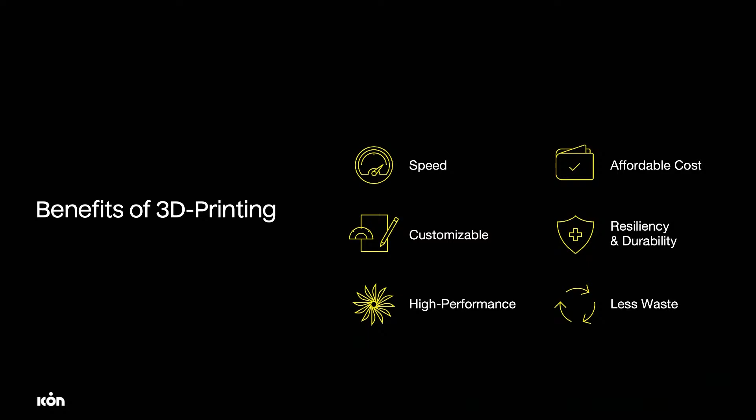The other key advantage and value add of additive manufacturing is that we have tremendous freedom of form that we can explore. I'll speak to that in a second. But overwhelmingly, what we've found is that compared with standard materials and methods like stick frame, concrete, and masonry, we have overwhelming speed when we're 3D printing out on site.

It introduces more affordable costs in the housing sector. We have a fully customizable system in the sense that, being a digitally native environment, you can essentially model and print anything within the realm of physics. So we play into that versatility to introduce customizability where we can. The printer is agnostic to what it prints.

And so we really try to introduce benefit by playing on customizability where we can in our work. Because we're using a mortar-based concrete material, it's a highly resilient system we've developed. We play into that to introduce a more durable system, which we believe has greater longevity than other materials and methods of construction.

To me, it's another, different way of thinking about sustainable construction. We're not building anticipating that there's going to be renovations happening within 3 to 4 years. We want to build architecture, homes, and structures that can stand for the next 100 years. This is a different kind of outlook towards how we're approaching design.

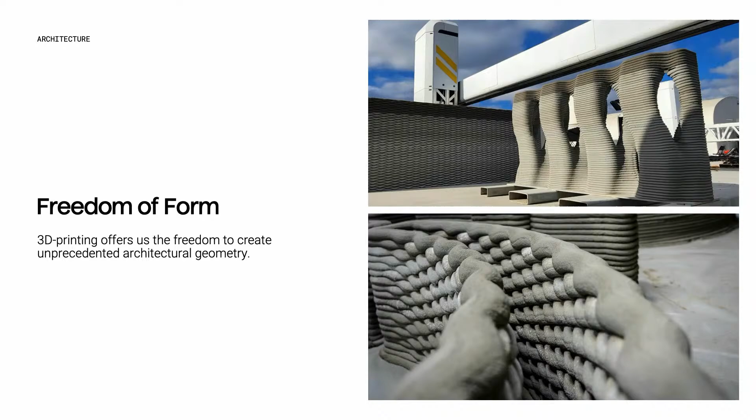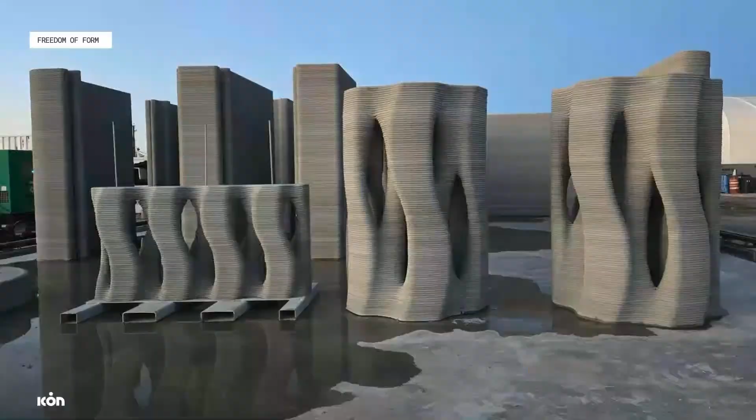So we play into the capacity to create organic geometries, more eccentric shapes, textures, and patterns where we can. We've also investigated domed structures and how we can create more corbelled geometries, which are more typical of compression-based structures, less typical of stick frame. This is something we look to incorporate in a way that's cost-effective and efficient in construction.

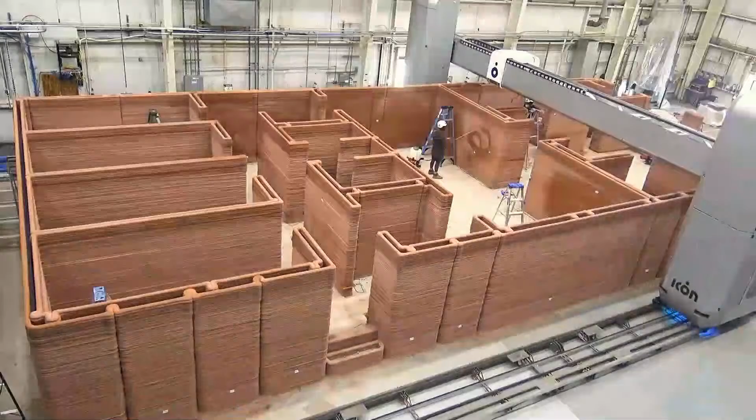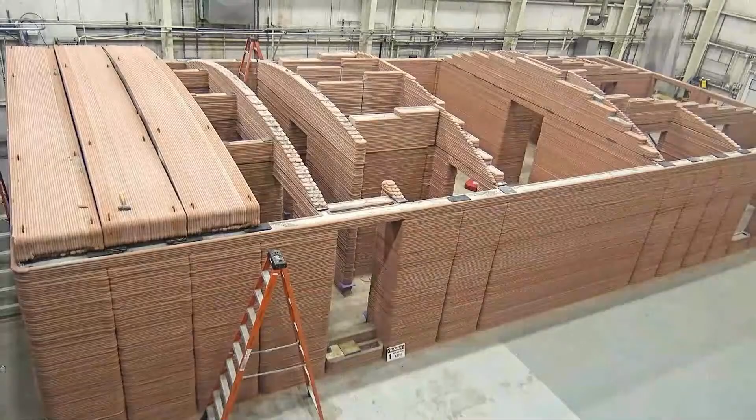This is a quick time lapse of what our terrestrial construction system looks like. You'll see that we're working with a gantry system, essentially operating on rails. The limit of the gantry system currently is 12 feet tall. We've been prototyping and working with this system to advance our on-site construction capabilities.

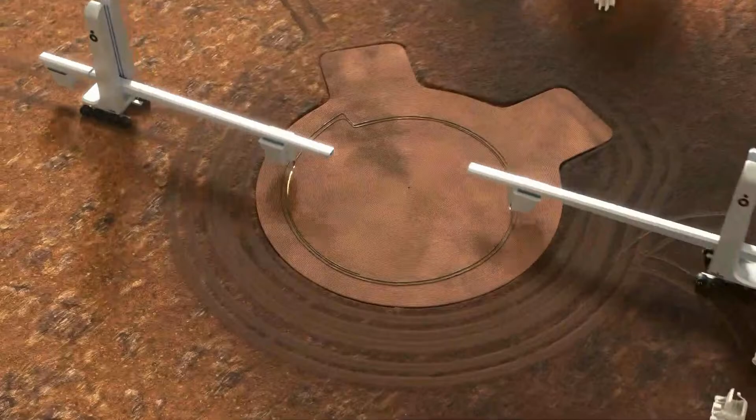That work has also been in support of advancing technology development for our in-space systems. Since ICON started, ICON has been a contributor and thought leader in thinking about autonomous construction on other planets, particularly the Moon and Mars. We use our terrestrial work as a vehicle for advancing essential technology development questions inherent in how you build on other worlds.

Around 2020, ICON started a collaboration with a NASA group called the Moon to Mars Planetary Autonomous Construction Technologies Program. This group at NASA is interested in using in situ materials, meaning local and indigenous materials, on the surface of the Moon and Mars to create various kinds of infrastructure. Over a one-year-long collaboration pursuing architectural visions, which Julian will detail, and working with academic and industry partners, ICON was awarded a $57 million Small Business Innovation Research Grant to develop technologies that can one day be deployed on the surface of the Moon.

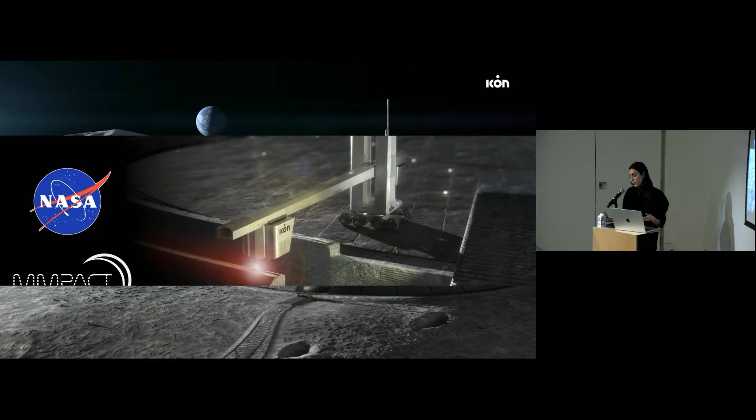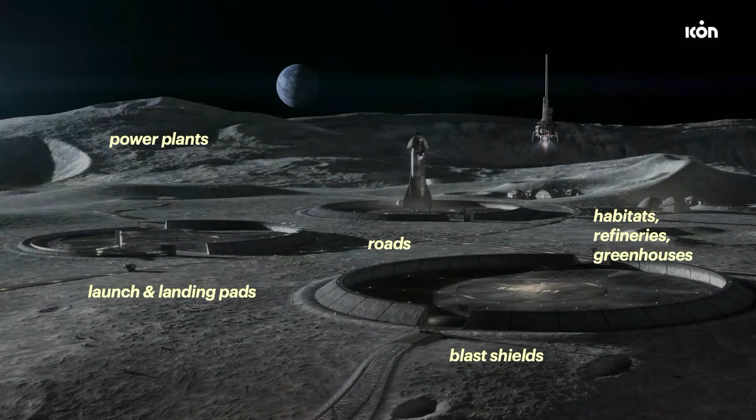In order to answer what hardware will one day 3D print on the Moon, we asked ourselves what are the artifacts, the specimens, the infrastructure this system would have to print. It became a call and response investigation, where to determine the hardware requirements, we had to ask what is the use case, what is the application of the technology. So ICON took it upon ourselves to introduce design concepts for habitats, unpressurized shelters, and we're continuing to work on horizontal construction types in support of 3D printing in space.

This was all done without being asked by NASA. NASA didn't say give us a vision for space architecture that can be 3D printed, but it's something we took upon ourselves because we felt it was important in pursuing the question of what is the most essential infrastructure. Pursuing various collaborations, we came up with designs and concepts for landing pads, blast shields, and habitats. Julian will talk more about one of those.

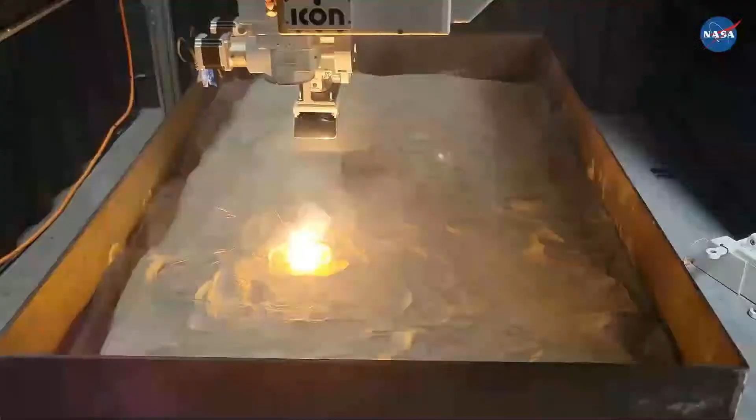Around that same time, in ICON's facilities, we started messing around with weapons-grade lasers. This is an example of a regolith test bed that we have in our headquarters in Austin.

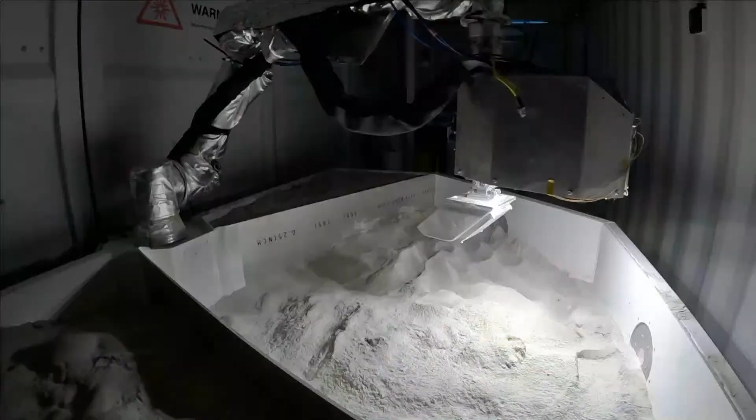Our off-Earth work, referred to as Project Olympus, has developed a robotic test bed with an end effector able to scoop, sieve, and process local regolith—basically the sand you see here, a regolith simulant—and sinter it onto itself. In successive layers, we apply more material, level it out, scoop and sieve it, validate it for its properties, and continue manufacturing the artifact.

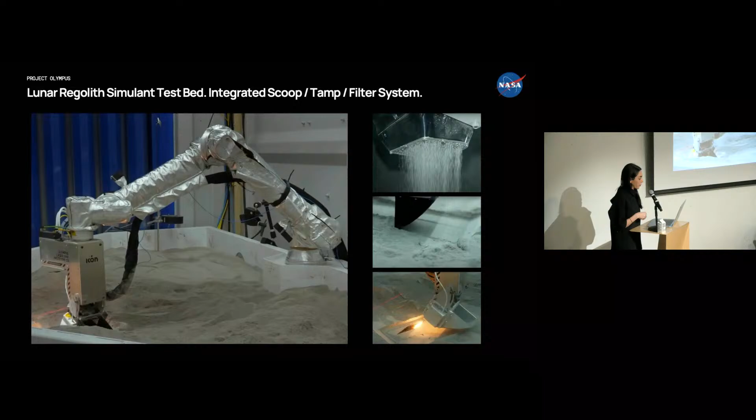Here's an image showing how we have an integrated scoop, tamp, and filtering system within this one end effector. We're prototyping that within a small regolith test bed of simulant, but also developing a prototype for a larger robotic manipulator, more along the scope and scale of what flight hardware might look like on the surface of the Moon.

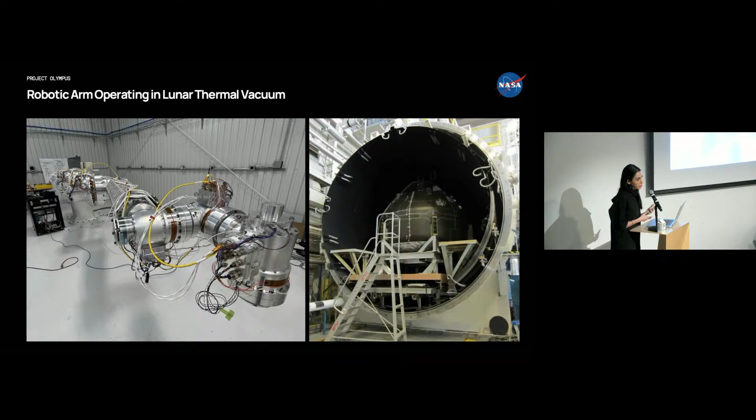In the last six months, the prototype robotic arm you're seeing on the left was tested within the Large Dirty Vacuum Chamber at Marshall Space Flight Center to evaluate how it performs and whether it can withstand lunar thermal vacuum conditions.

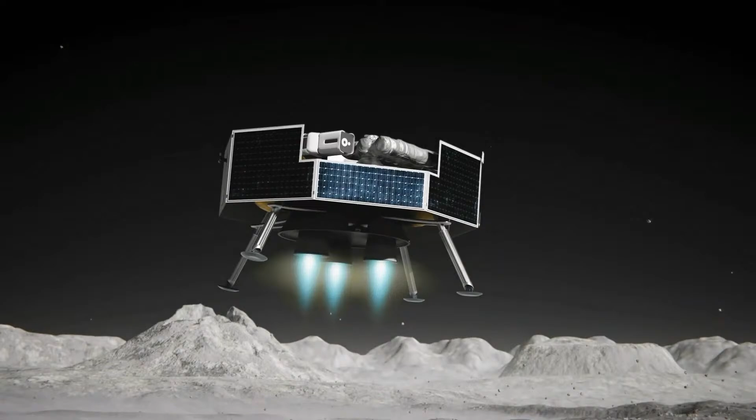We created this video to show what we feel is going to be the first demonstration mission with this system. Essentially, we're looking to deploy the Olympus robotic arm aboard a generic CLPS-style mission, which is what you're seeing here—this is a CLPS lander.

The robotic manipulator would scoop the local regolith, validate it for its mineralogy and properties, create a level surface as you saw within the small robotic test bed, and then lay successive layers upon itself to create the kind of infrastructure we're most interested in.

Our first demonstration mission is planned within the next six years, I would say, although we're not flight manifest right now. But the important thing is that the technology development has been happening steadily since 2020.

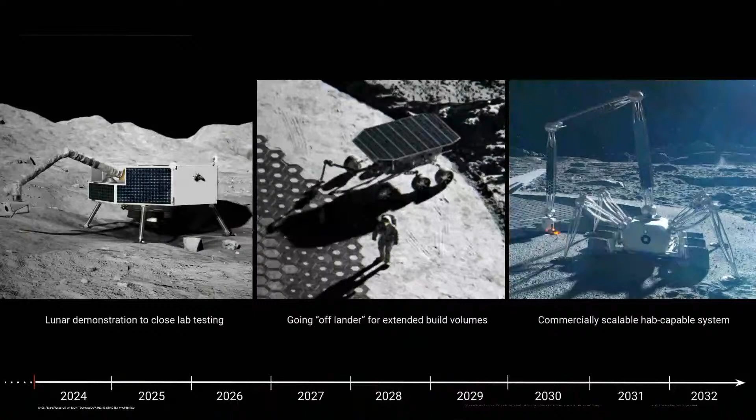Our vision is that the first demonstration mission would be aboard a CLPS lander. Eventually we'll go off-lander to build extended volumes. And then finally we'll have a commercially scalable, habitat-capable system that can create large-scale infrastructure that can one day house human beings or crews on temporary missions.

A lot of the technology development was not directly influenced by the architectural work and vision we put forward to NASA. However, when they saw that work, they immediately attached to it. And something remarkable happened—it's almost like you have to see it to believe it.

Our vision, and the vision put forward by the Bjarke Ingels Group, who was a consultant to ICON at the time, as well as by Space Exploration Architecture, was taken by NASA's Space Technology Mission Directorate, STMD, and they assembled the roadmap for their own excavation, construction, and outfitting capability development.

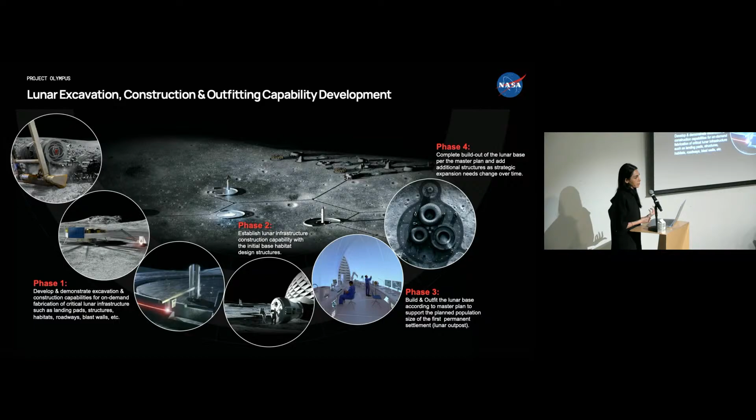I can't stress enough the power of an architectural vision to synergize thought leadership about very difficult, very wicked ideas that are hard to imagine and hard to really see happening in the world.

All of this work we're imagining happening in space brings direct impact to how we advance our technology here on Earth. We did an exercise with the NASA team investigating how we can create shared technology development initiatives in both our residential construction work, NASA's in-space construction work, as well as for the Air Force and the DoD. Overwhelmingly, there are shared initiatives among the three.

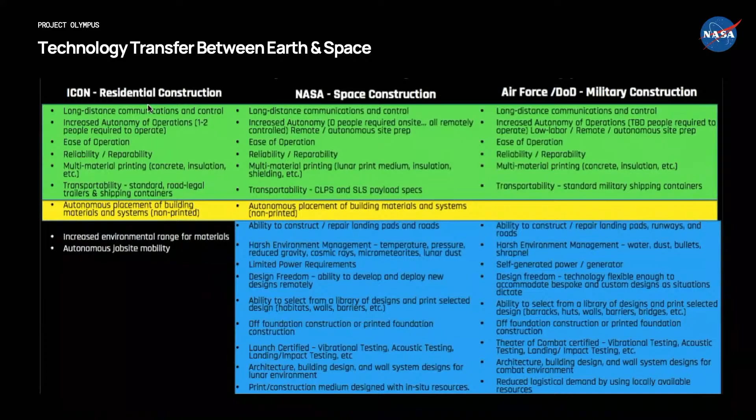Our thought here is, why not create dual use between Earth and space, create value at the same time, and solve these really challenging problems we have? Which brings us back to Earth, to the terrestrial construction systems. I'll speak to how and why we're creating the wall systems that we do, and also some of the regulatory implications of permitting 3D printed structures today, since it's still perceived as an emerging technology.

It is an emerging technology, yes.

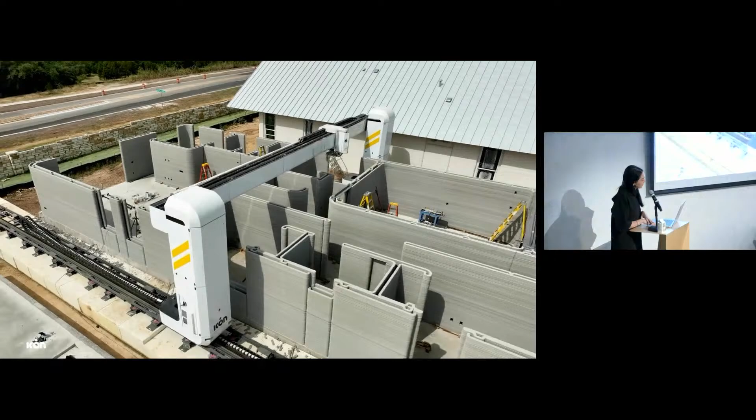So this is our Vulcan system. I mentioned it's a gantry-based construction system. It operates on rails. We have 2 towers as well as an X-beam that have been designed and engineered to fit within a shipping container. The height constraint of Vulcan is something to note, but this was a system specifically engineered for single-family detached housing, so we weren't looking at multi-story or multifamily construction at the time.

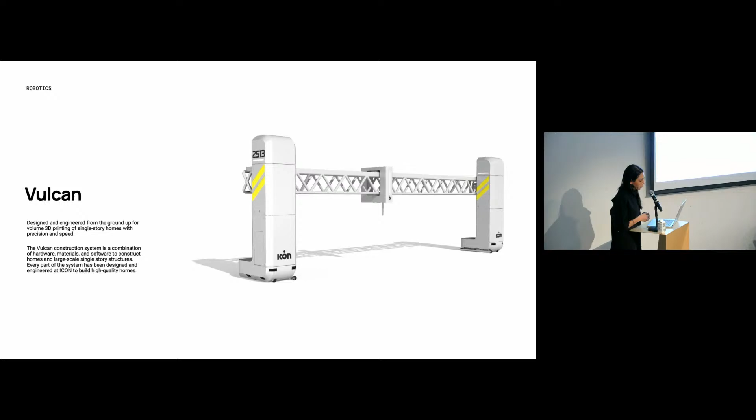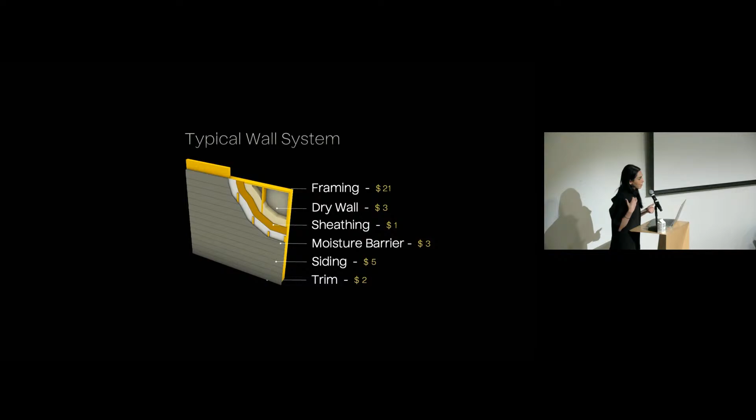In regards to wall systems, within a typical stick frame construction system, you have multiple trades and multiple materials and finishing items that you need to complete your wall system and create a weatherproof building enclosure. The important thing is that each of these elements has to be done in sequence, so if you have a delay on site by one of your trades, it delays the entire construction process. There's no way of really optimizing that when you have these disparate trades showing up at different times.

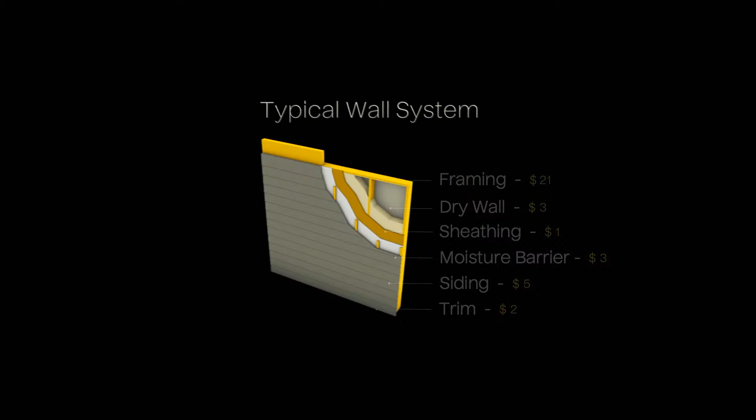You compare that, and what we're looking at, forgive the marketing speak, is an R13 wall, typically with no wind ratings and no fire ratings. There's potential for stick frame construction to be damaged by termites, damaged by mold, and it rots in water. Not very good in coastal regions or areas prone to flooding and hurricanes.

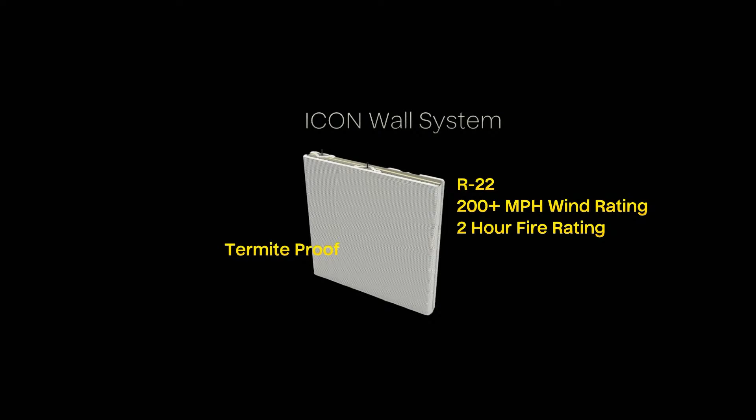Whereas, in contrast, we've developed a unified material and structural system with our 3D printed wall. Effectively, the material itself is the structure. We create formwork for structural cores within the wall system itself. It's a system that maintains high thermal mass.

Our lowest R rating is basically an R22. We can create more thickness, add more insulation in the wall for it to go up to like an R40. We have a 200 mile per hour wind rating. It's 2-hour fire rated, termite proof, mold resistant, flood resistant. So it's a way more resilient system. And of course, we're working in concrete, so the advantages are there.

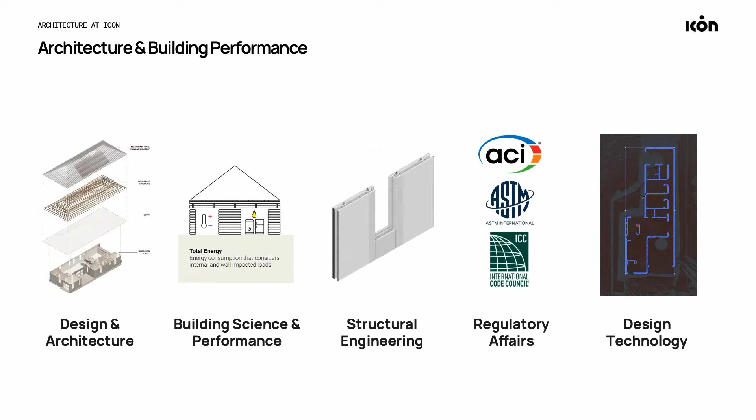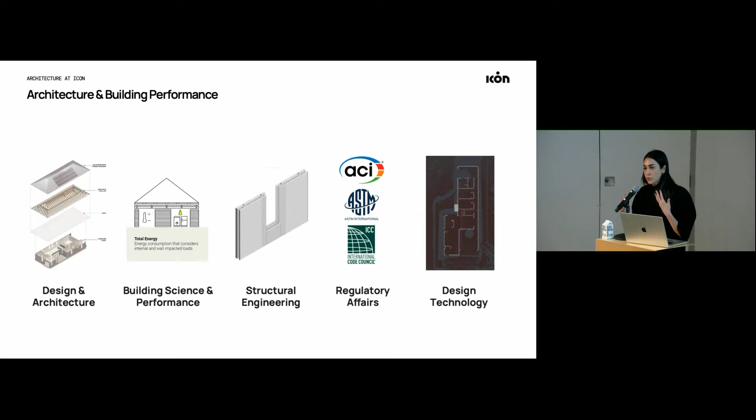When we started out investigating what architecture and building performance was at ICON, we realized that we need to merge many disciplines together to really address the problem of how you build and create wall systems and building enclosures using 3D printed construction. It was important for us to consider not only design, but also building science and performance, structural engineering, because this is an inherently structural system, and regulatory affairs, so that we can introduce a viable way for our system to be built in jurisdictions that know nothing about 3D printing, and design technology, which is essentially how you translate your design intent into functional G-code that the printer understands, but also permittable drawings.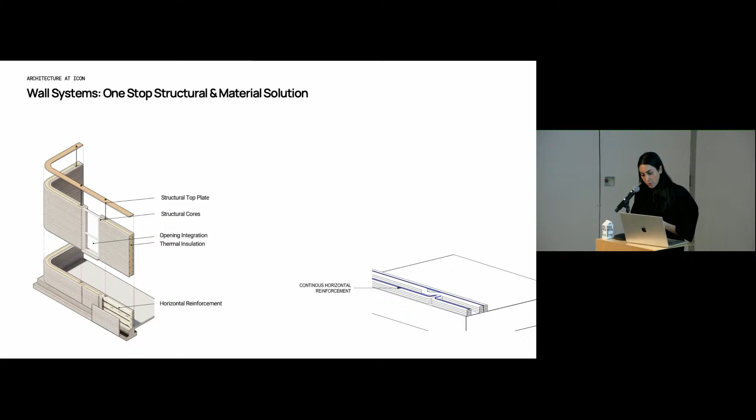So a little bit about the wall system. In this animation, you'll notice various types of reinforcement being added within the wall system at various points in the print. We have the capacity to include electrical as well as plumbing rough-in within the walls, and we've started to introduce a standard set of details for how we finish openings and create roof-to-wall connections. But essentially, there is a cavity with insulation within the wall.

I'll let it run again so you can see a little bit better. We have horizontal, vertical, as well as transverse reinforcement within the wall. So this is truly a building assembly and not just a single material that gets printed like on a desktop 3D printer. We work to resolve various architectural conditions within the prints for every project we encounter.

We pursue various certifications having to do with the 3D printed wall. Some of those are from ICC-ES, in particular the AC 509, one of the most well-known appendices written for 3D printed construction. We're compliant with IBHS Fortified, and we pursue many certifications to improve confidence in the system so that we can build nationally and hopefully globally in the future.

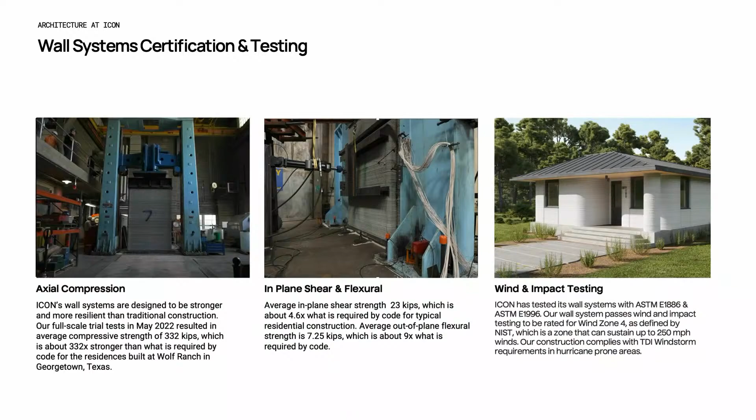Every change to a wall system requires a whole slew of testing, and you start to get a sense of just how monetarily intensive and demanding it is to create wall systems that have these certifications. That's a huge barrier for new systems and new technologies within architecture and construction. These are some of the regulatory bodies that we contribute to in subcommittees and making recommendations for standards.

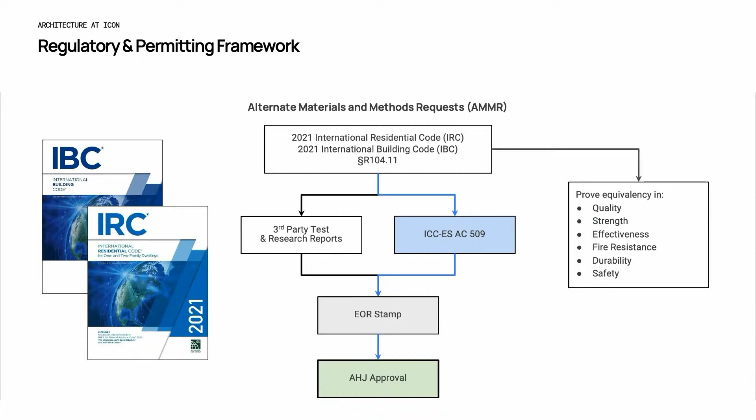The truth is there's no internationally accepted building code for 3D printed construction today. Currently, the way we're permitted in most parts of the United States is through a provision within the IBC that specifies it's up to the judgment of the building inspector to determine the soundness of the engineering and construction. That means we're typically providing a lot of engineering data and testing data to every city we're permitting within.

The alternative is to refer to the ICC-ES AC509 certification, which is kind of like a product acceptance criteria that's been reviewed by ICC-ES, validating the quality, strength, effectiveness, fire resistance, and durability of the system. We have a long way to go before every jurisdiction accepts AC509, and who knows, there may be new standards in the future that update that or take it to the next level.

I'll speak to a couple of project examples very quickly just to give you a sense of the scope and scale of things we've printed in the past.

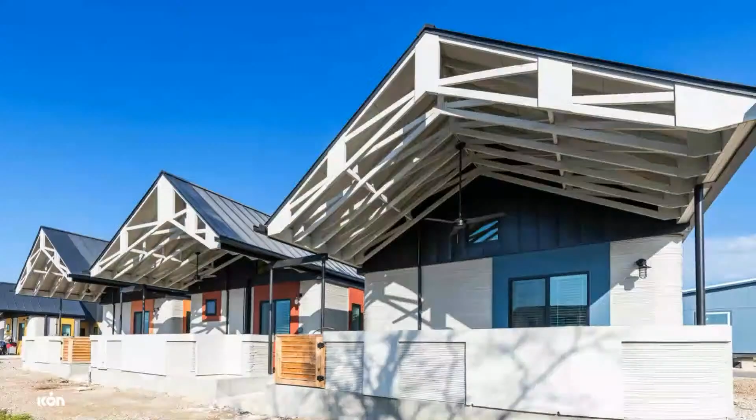Community First Village is a project that's very meaningful to us. It's a community based in Austin, Texas that caters exclusively to formerly homeless individuals. Our first project with them, we delivered a welcome center as well as 12 homes. These were all printed, several at a time, I believe 3 at a time, and they're all still occupied by their inhabitants. We're very excited about that. It shows that we're very invested in demonstrating how the technology can be used to create an impact in affordable housing. That's something very near and dear to our hearts.

New Story Mexico — we completed some homes for a community in need in Nacajuca, Mexico. These homes, interestingly, withstood a 7.4 magnitude earthquake. We were connected with a community in need through New Story Charity, who was on the ground in Nacajuca identifying what the needs were, and it was a wonderful collaboration. This is ICON's first and only international, global project.

About 2 years ago, we unveiled House Zero. This is the first of ICON's exploration series of architecture — a self-funded project where we asked, what is a home, what is a design that can only be 3D printed and cannot be built through any other means or methods of construction? ICON hosted a competition, and the design selected was by Lake Flato Architects. You can see here what we collaborated with them on over the scope of the project.

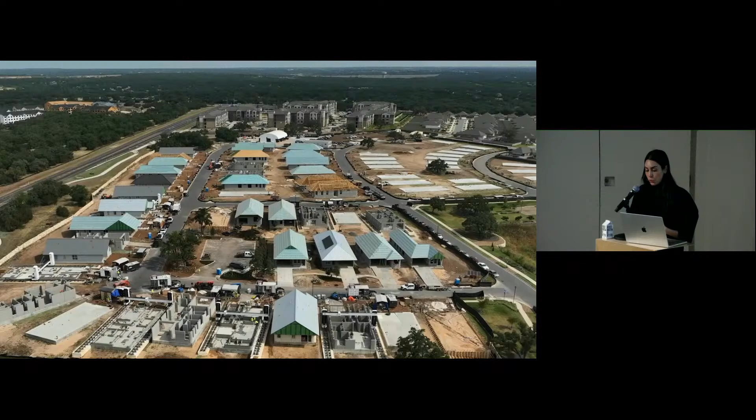In contrast, Wolf Ranch is our largest project to date, one in which we collaborated with the Bjarke Ingels Group to reinvigorate a housing collection by Lennar, one of the largest production home builders nationally today. We're nearly done with all the 3D printing in the community, and interestingly, Lennar, who's intended to finish the homes with roofing and finish-out, is taking much longer than we are. However, these homes are for sale, so if you know anyone interested in a 3D printed home in Georgetown, Texas, there's absolutely an opportunity to purchase one.

Here you can see we had 8 printers deployed simultaneously to complete this project, 2 operators per slab. At least in my experience, I haven't seen a larger display of robotic construction happening on site at the same time at this scale.

People have said it's the cleanest construction site that they've ever seen, and that's something we really take a lot of pride in.

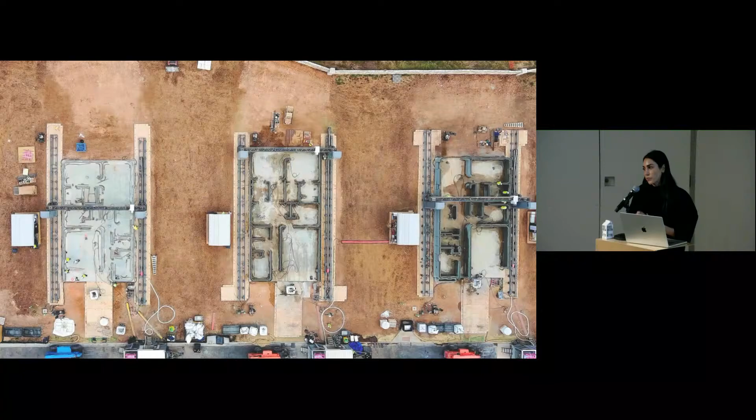Each of these slabs represents a 1,700 to 2,200 square foot floor plan. It took about 2 weeks to print the vertical wall system of each home, and then finish out by Lennar would traditionally happen on the order of 6 to 8 months. So there's a drastic time difference there.

This is a rendering of the interior of the Wolf Ranch homes, and this is what they actually ended up looking like. The homeowners who've already moved in are basically living on an active construction site, and what they've told us is it's still the quietest community they've ever been in. It's kind of remarkable to think about it that way.

Disaster resilient housing: we've completed some replacement housing for homes that FEMA promised to individuals who lost their homes in hurricanes and then never delivered, unfortunately. We were accepted as part of their resilient housing program to provide replacement housing. Again, a very meaningful application of the technology to families that really never thought they were going to have somewhere to live again.

And this is all on the Gulf Coast of Texas.

We've also done quite a bit of work for the Department of Defense, in particular creating barrack structures, which are transitory training facilities for troops. These are some of the interiors as well as the exterior of those facilities.

Initiative 99, I'll speak towards this as well as some of our newest and latest technology products, and then I'll hand it over to Julian.

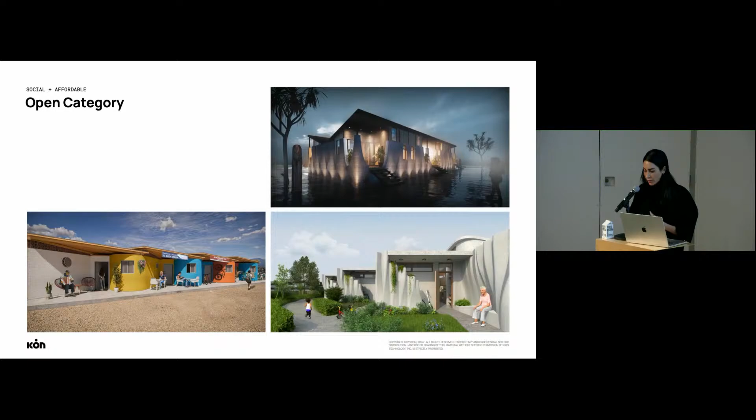The awards were just announced for Phase 2 this past week. These are some of the winners from Phase 1. You have a design for New Zealand, a design for Bogota, Colombia, a design for Berlin, and in the student category, a design—I forget where that one is, I think it's in Peru—and a design in Berlin.

In the second phase of the competition, we asked these contestants to adapt and adopt their designs for construction at Community First Village. Two of the winners are actually going to be built this year, which we're super excited about.

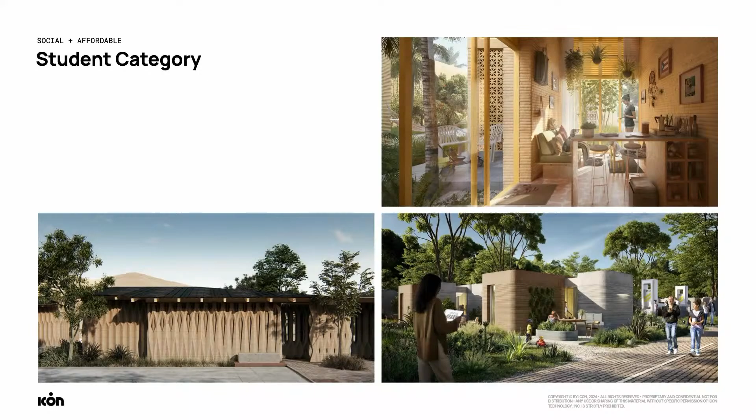We made a promise to ourselves that we did not want to do a paper architecture competition. We have enough designs coming at us; we can come up with our own designs as well. We were very committed to showing how this work could actually be put to good use and deployed in the field in short order, without waiting many years.

So a quick product review, and then I'll hand it over to Julian. Just this year, we're always developing our technologies in multiple areas: software, architecture, advanced materials, robotics.

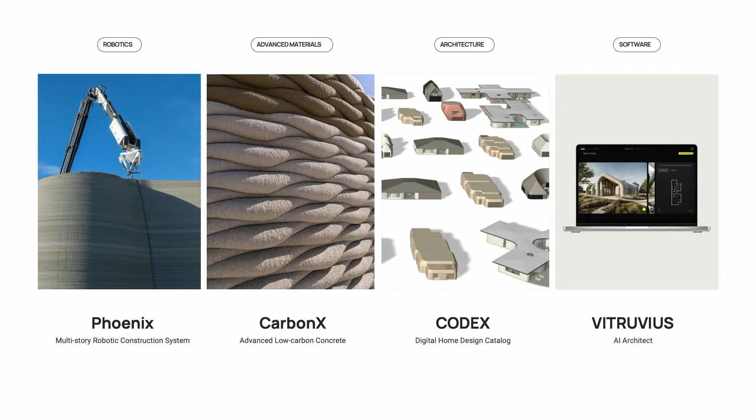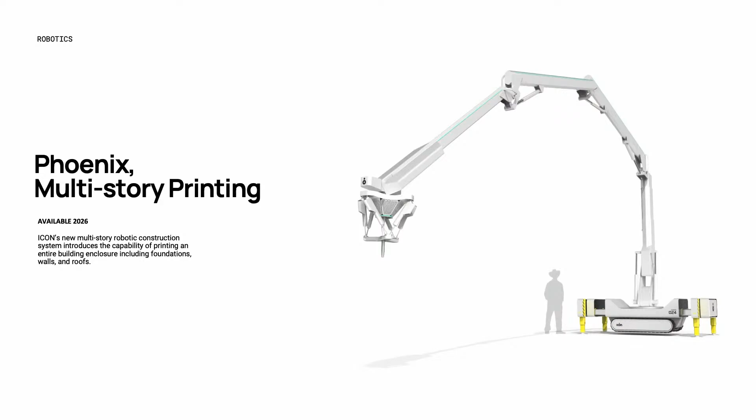This year we announced a solution to questions we get asked a lot: can you do multi-story? Can you do infill? Can you do more eccentric geometries? Phoenix became a solution and a way of addressing how to create those more eccentric geometries, but for a fraction of the cost it takes to deploy Vulcan.

We are working with this robotic arm form factor. This is a demonstration structure we created to actually show what's possible using Phoenix. It's right outside of our headquarters in Austin, Texas. The most important thing for us is to really show and demonstrate how we can create this freedom of form through the design, the architecture, the structure.

We've also developed a low-carbon concrete material we're referring to as CarbonX. We're well aware that concrete does not have a wonderful reputation when it comes to carbon emissions globally. Some of that has to do with how ubiquitous it is, but it's very important to us to develop material that can be more sustainable and reduce the carbon impact of our work and construction. We're working largely with geopolymers in developing CarbonX. I'd say our next challenge is to create a more affordable and more competitive material that can be adopted worldwide.

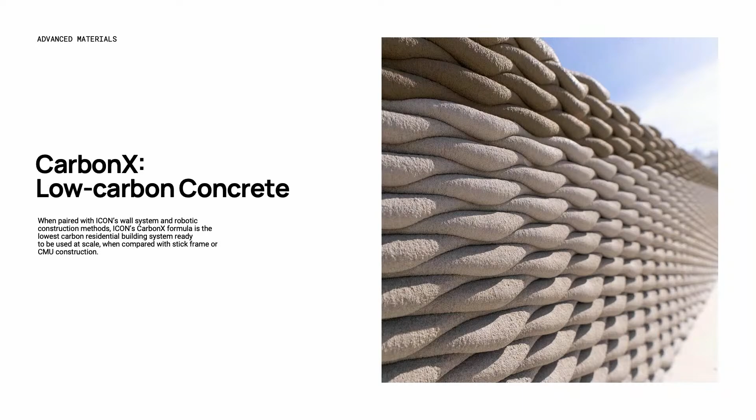But essentially, this is the material that we're using on all of our construction moving forward. It demonstrates our commitment to sustainability over everything, really.

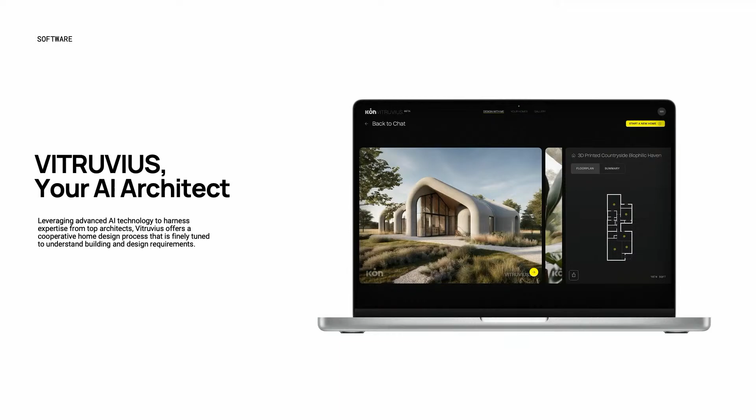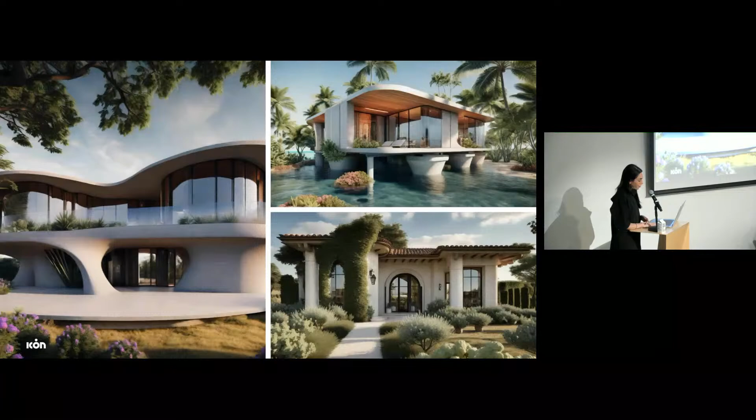And then second to last, we've introduced a platform that uses natural language processing to rapidly improve and enhance what design innovation and ideation looks like for 3D printing. There are a lot of image generation softwares on the market right now using AI and machine learning to create images, but we asked ourselves, can we create a platform that is unique and specific to 3D printed construction, and that can also create build-ready plans that are 3D printable with our system? This is some of the work we're developing, and there'll be lots more to share in coming months. And lastly, we also announced this year a digital home design catalog.

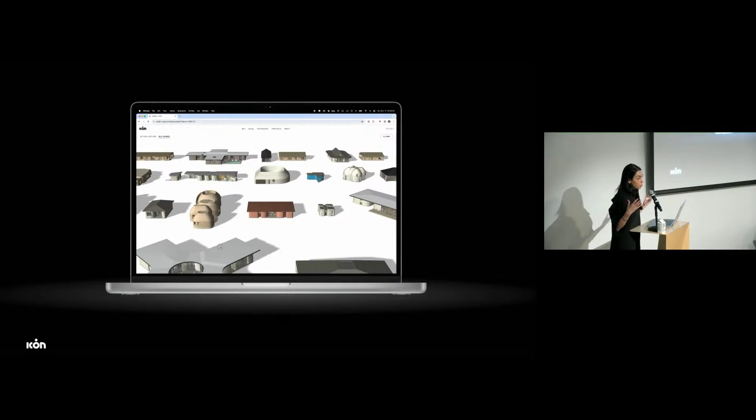A lot of the times people come to us, developers, cities, and they don't know where to start. They say, we don't have hundreds of thousands of dollars to invest in design using a firm, but we want to create a subdivision, some kind of neighborhood or community using 3D printing. So what we came up with is Codex, which is essentially an online catalog of 3D printable designs that can be used in an open source way by others within the construction sector, and also as a starting point for us to imagine new communities and subdivisions with our customers.

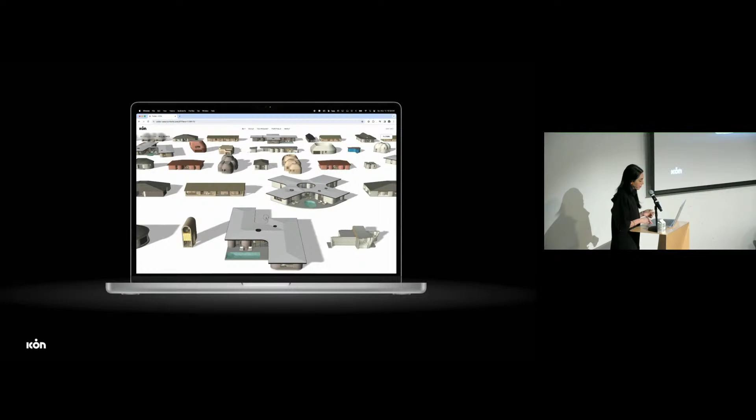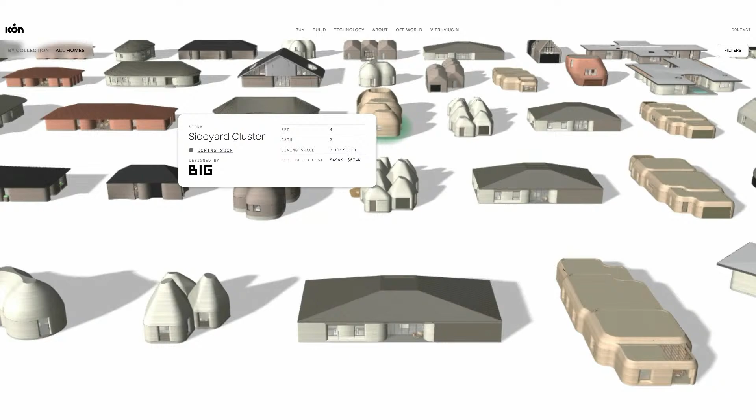Codex hosts many collections, and it will continue to expand over time. We're super interested in how we can collaborate with folks outside of ICON, architects, students, engineers, to think about what 3D printed construction should be in the future, and continue to expand this catalog as a platform for construction, again, in a very open source way. And with that, I'll hand it over to Julian to go into more detail on Codex.

Okay, thank you, Melodie, and thank you, Skylar, for the invitation. As Skylar mentioned, I was a student here, so I'm moderately nervous about being in this room right now. I presented several projects here to what can only generously be described as mixed reviews, so hopefully you guys will be a slightly more forgiving jury.

This is an example of the type of Codex collections that we have generated. Before I go through all the design work in here, I used to work as a project lead at BIG, and a lot of the design you're going to see here was done as part of that job, even though now I'm the director of building design at ICON.

These are two of the Codex collections we produce. One of them is to build homes in fire-prone regions, and another is to build homes in storm-prone regions. Why? Because as Melodie explained earlier, our wall system performs really well in both of these conditions.

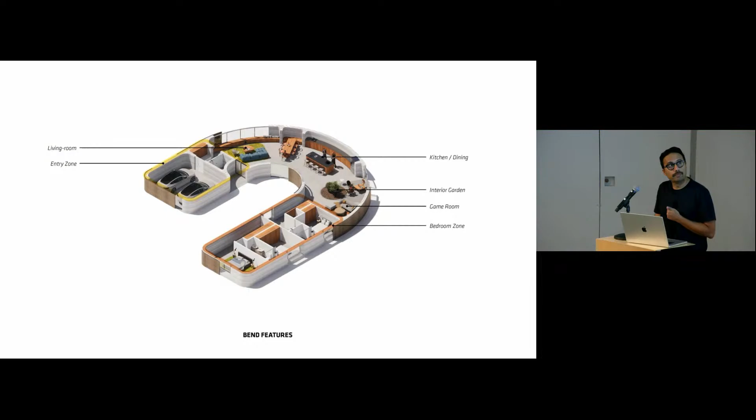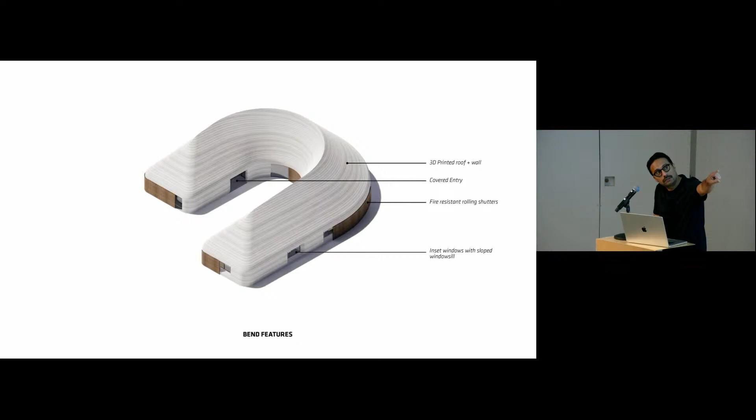So this is one of the homes that we designed for the fire-prone regions. This one we call Bend. You can see it has a kind of concrete shell that would protect it from fires, and it has these moving shutters that can protect it from fires as well in the case of a fire event.

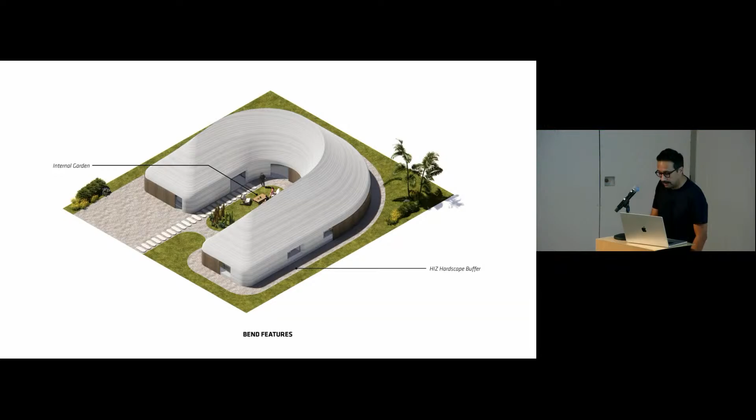Another thing that is extremely important when designing for a fire-prone region is landscape. So you can see here that we took care also of designing the landscape to make sure that the house does not come into contact with fire. You can see the home here. These homes are to be built with the printer that Melodie showed last, the boom arm printer that can print up to 27 feet. In the interiors...

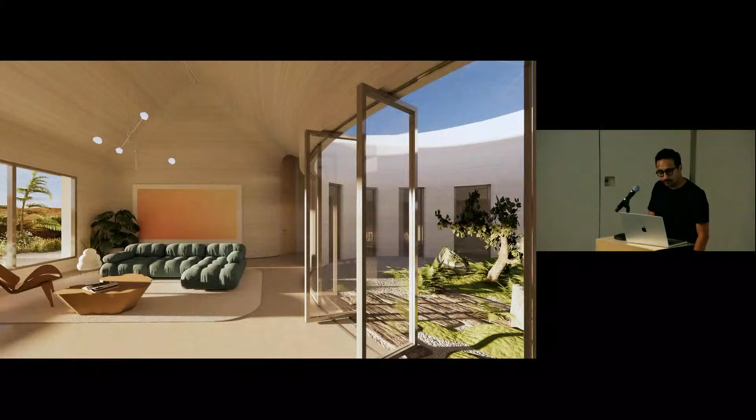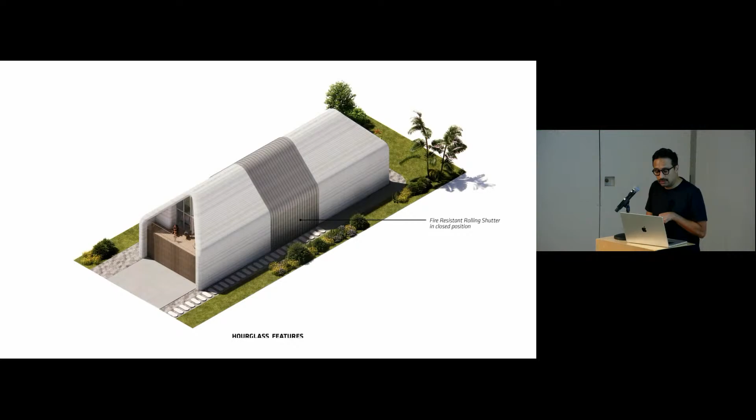There's another version of a home to be built in a fire-prone region. It has this kind of concrete shell and a protective gate or door that closes in the case of a fire event. You can see it from the side. It generates this really nice indoor-outdoor space that is quite vulnerable to fires, but it's able to be closed during the fire. You can see the top of it.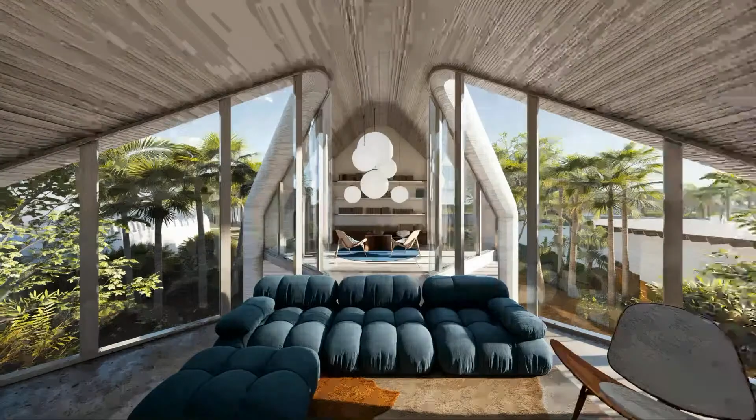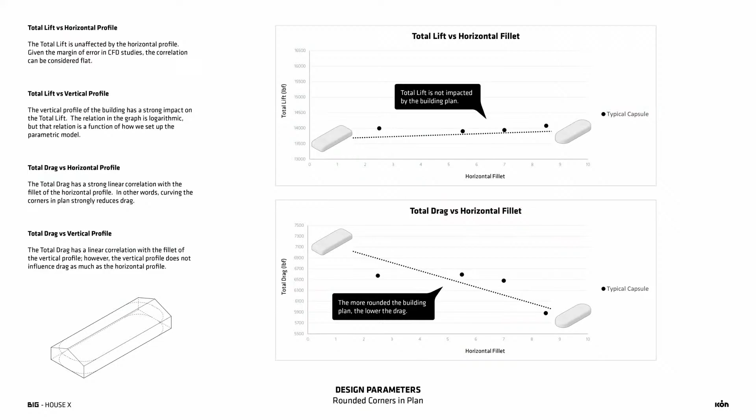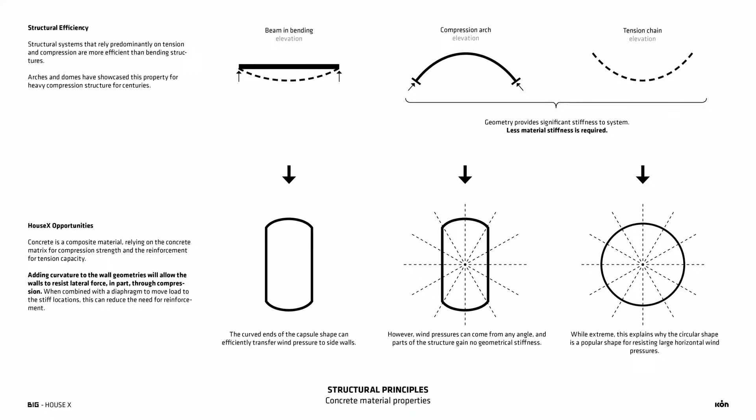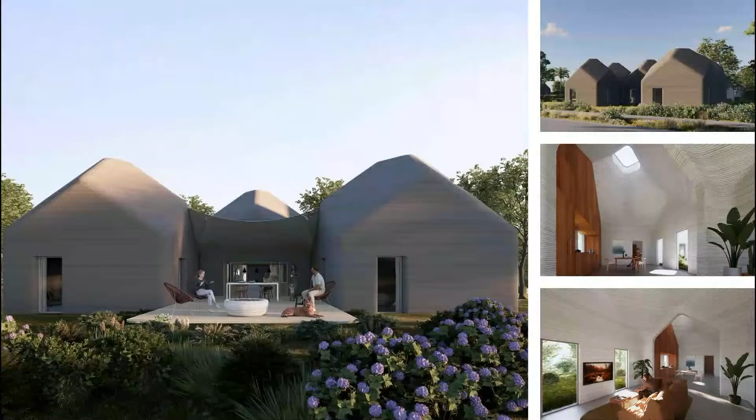And then we also produced a collection for storm-prone regions. We did a lot of analysis on what kind of shapes and forms would be best suited for these regions to resist wind forces, water, and all sorts of stuff. We concluded that to respond better to wind pressures and forces, a more circular or aerodynamic architecture would work best, and all of the forms of the collection that comes later in the storm collection are informed by that. So you can see the homes are more segmented, you don't have such large surfaces, and they're all much more broken up on the roof as well as on the rooms.

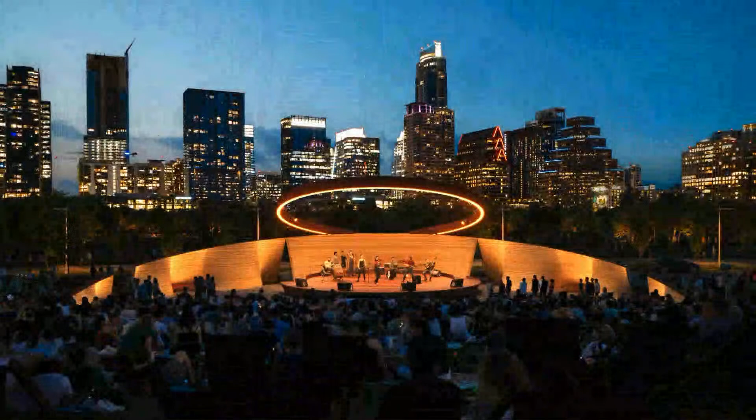I'm going to show you a pavilion that we built in Austin. This is a performance space we built at the Long Center in Austin, fully 3D printed, built to publicize our shared project with Icon, Big, and El Cosmico. It's called the Cosmic Pavilion. El Cosmico is a hotel located in Marfa, where we'll be building not only the hotel but several homes. This was the way to show everybody the language that the hotel would have and explore what's possible through 3D printing. You can see all of the geometries that are super expensive and very difficult to do with a different system, but we were able to achieve with printing.

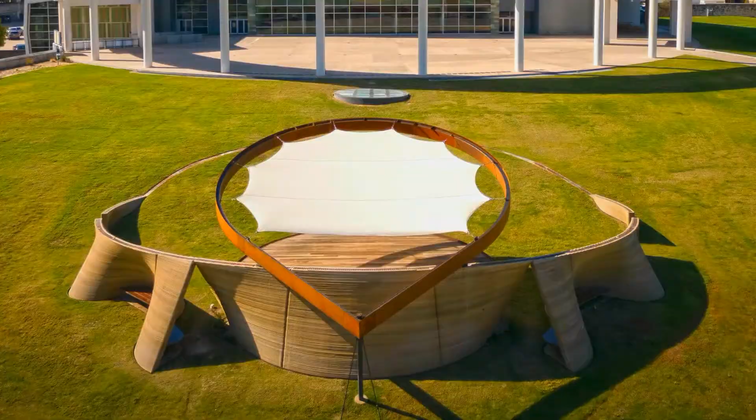A lot of curvatures, angles, and overhangs would require, if you try to do this with typical poured concrete, a lot of thinking about formwork, reinforcement, and all these things. It's a lot easier to do with a 3D printer, which enables us to create architecture like this without the expense of essentially having to build it twice.

You can see here a couple of different room types and the bed for one of the room types. So again, another thing enabled by 3D printing is the ability to build in a lot of furniture and different features.

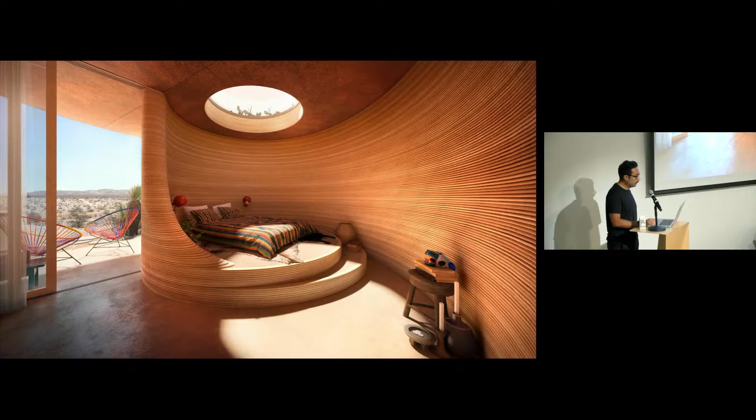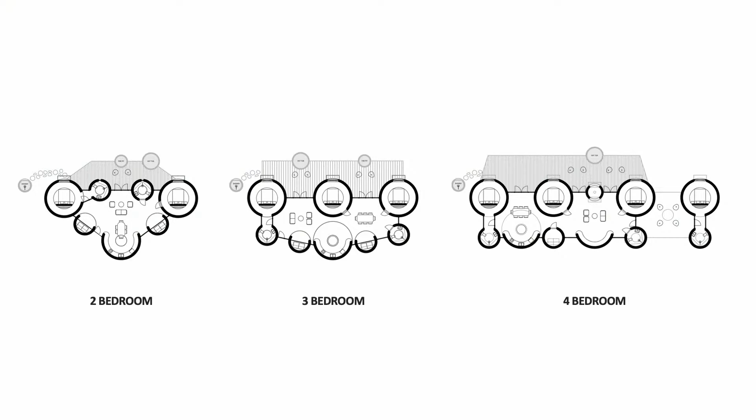That takes me to the homes we are building, called Sunday Homes. We're building these currently in Marfa. They're designed to have a modular idea, where you create one perfect bedroom and then multiply it or reorient it and organize it in different ways, combining it with different kitchens or modules for living rooms, etc.

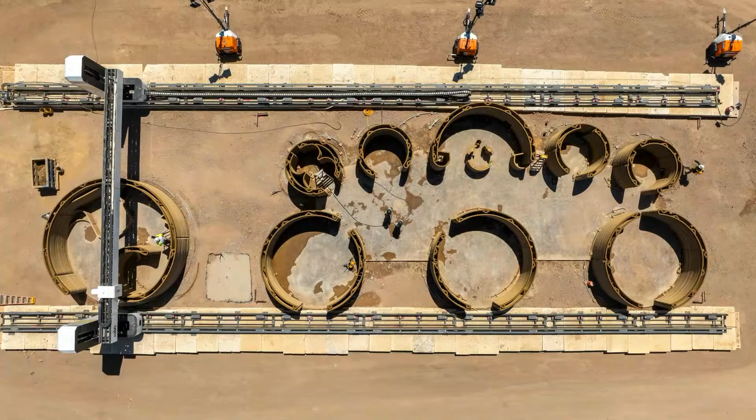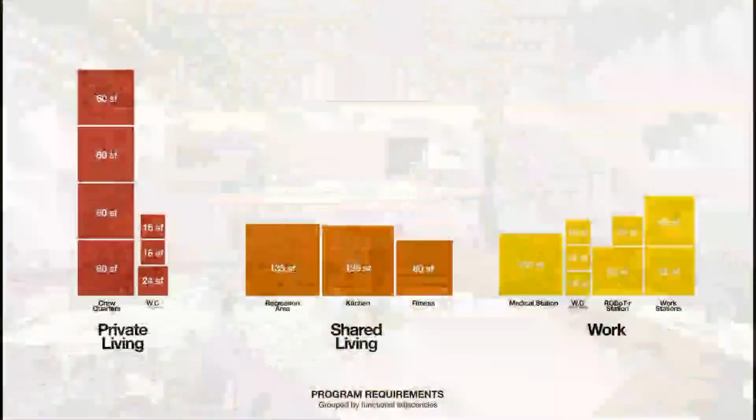The project that Melodie mentioned is the Mars Dune Alpha—a simulated Mars habitat built by NASA to study how people will live on a long duration mission. So how will people live on Mars, not necessarily how we will build on Mars, but how we will live there. We built this—this is of course a render, but we built it inside a hangar at the Johnson Space Center. What was really important to us was making sure the people living there, since astronauts will be living there for a year isolated from everybody but themselves.

They'll be living there simulating the kind of communication lag you'd have if you were living on Mars—so if you say something right now, you'd have to wait another 20 minutes for that to reach Earth and come back. They're quite isolated, with no contact with anybody other than their three other crew members. Imagine living, working, playing, and watching movies with your roommates for an entire year without being able to go outside.

So that is the kind of study that they're undertaking right now. For us, it's really important to be able to separate the moments of private living versus the moments of being social and outside, talking to other people. So we split the plan into 3 different bands: private living, shared living, and work. The plan was organized based on those principles.

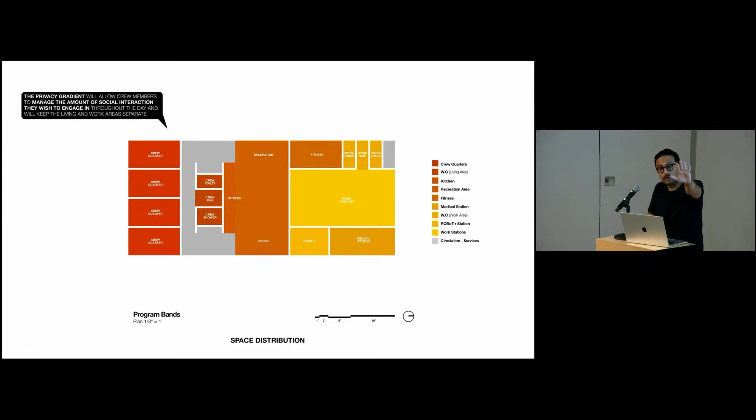You can see how it transforms. You have all the super private stuff here and the more work-related stuff on the other side, so that if you don't want to be social, you can just stay in your room, go to the washroom. You don't have to see anybody for a couple of days if you don't want to.

Some of the interior shots of the habitat. The first mission already took place. The first set of 4 astronauts who lived there for an entire year just came out in the past few months.

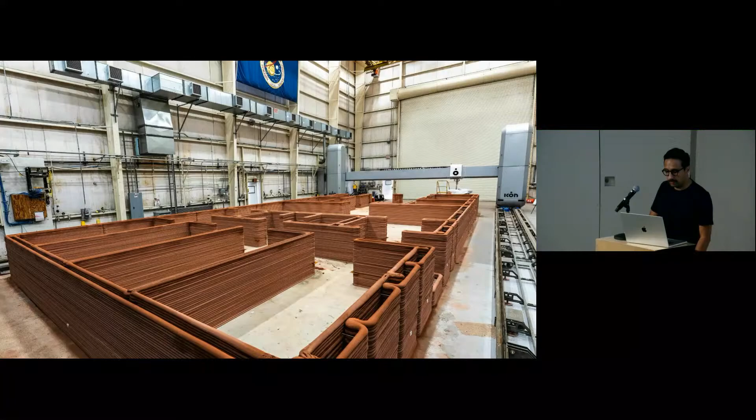This is what we were printing. Melodie already showed a really nice video of this earlier. This is the simulated mission, the folks that were in the mission and the crew. The Johnson Space Center puts out podcasts where they talk about everything going on in the center and with space. Every month, the crew of the Mars Dune Alpha would give everyone an update on how they're doing and what's going on. Sadly, they never spoke about the building, which is kind of... yeah.

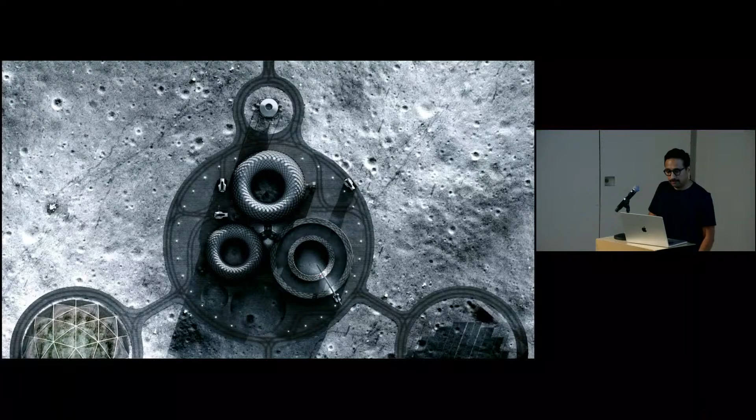The last project I'll share with you guys is the Olympus habitat. Melodie spoke a little bit about this project, and this is essentially what we were pushing for that machine to be able to build, like what we thought it could be. So how do you build something on the moon?

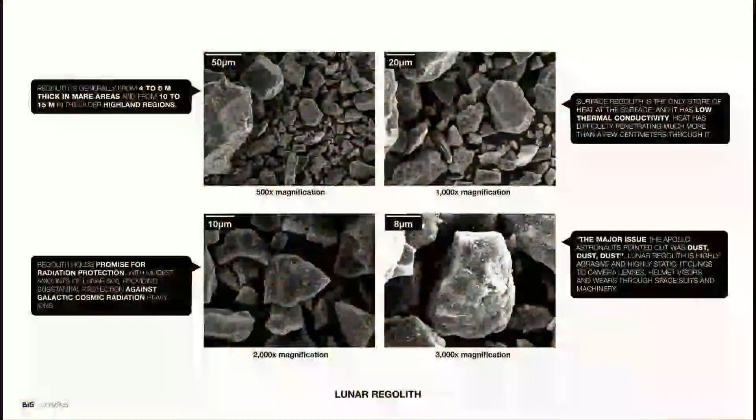You have to learn from Earth vernacular. How do we build shelter in the Antarctic, or how do we build shelter in the desert? The way we do it is we use whatever is there as our construction material, and then we evolve from that. So, as a conclusion, our building material on the moon is going to be lunar regolith.

Lunar regolith has all of these insane characteristics, a huge one being that it's incredibly abrasive. So how do we treat all of this? The laser sintering that Melodie showed you guys earlier is going to deal with this material. That's the goal. Once you start dealing with regolith as your building material, a kind of lunar vernacular emerges, where melted regolith becomes your main building material. So with that in mind, how do we create a habitat that would work under those conditions?

If you think about an inflatable structure, ideally it would have to have a round section so that the pressure is evenly distributed. The ideal section for a structure that's only 3D printed would be triangular, where the angles of the walls match the maximum angle of overhang of your print. I'm assuming all of you here have printed something at some point, so you know what I'm talking about with angle of overhang. But what we did is create an optimal section that accommodates both a pressurized structure and a printed structure.

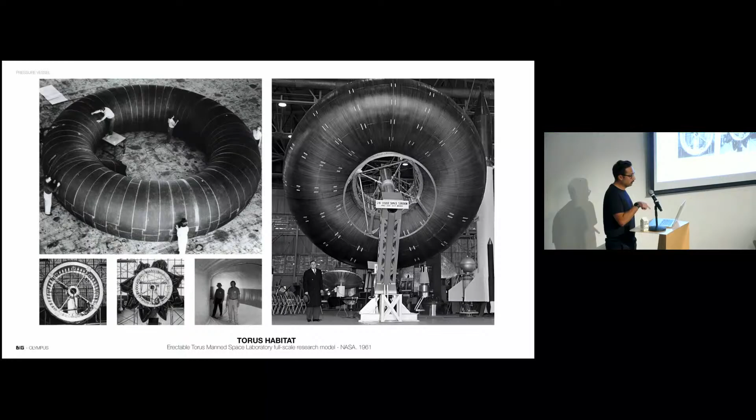For the overall shape, we built on a lot of studies about the optimum geometric shape to accommodate the maximum amount of space, not only in square footage but also in volume. These are some of the images and designs that came out of that. This is our habitat here on the left.

And I have one online.

Please share more about the typical concrete mix. Does it include any post-consumer waste, and what is the typical embodied carbon content of your mix per kilogram or pound?

Oh yeah, we can. Let's see, go sit over here so that they can all see us. Okay, the first part of the question, remind me.